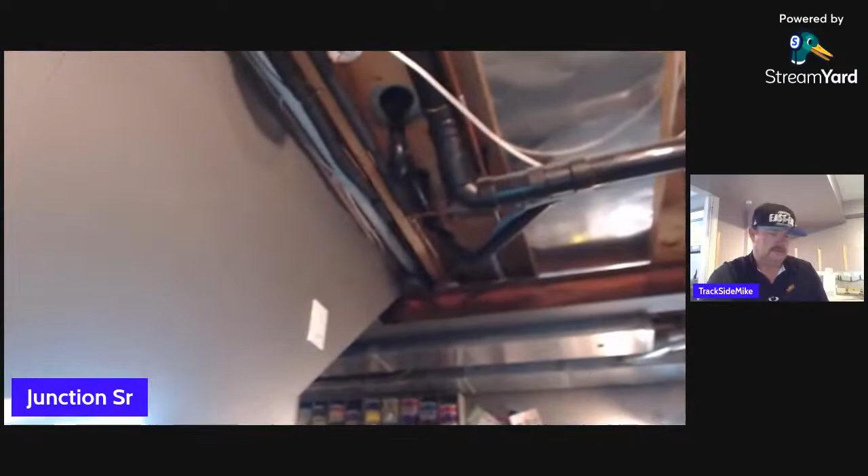This camera will pivot and I'll see which one gives me the best view. I'm gonna go through some things here, so I'll change this camera around a bit. All right, there you go, shows you the floor. Split Rock, how's it going? There's the ceiling, there's the bench, so you can see that pretty good here.

So I have on my desk here all kinds of wiring stuff. Can you see all this, Mikey? Yeah, we can see it.

Did you get that mat from M&M Rails? No, this came from OVR Trains. Okay, I just checked it, it's an XL mat. Nice.

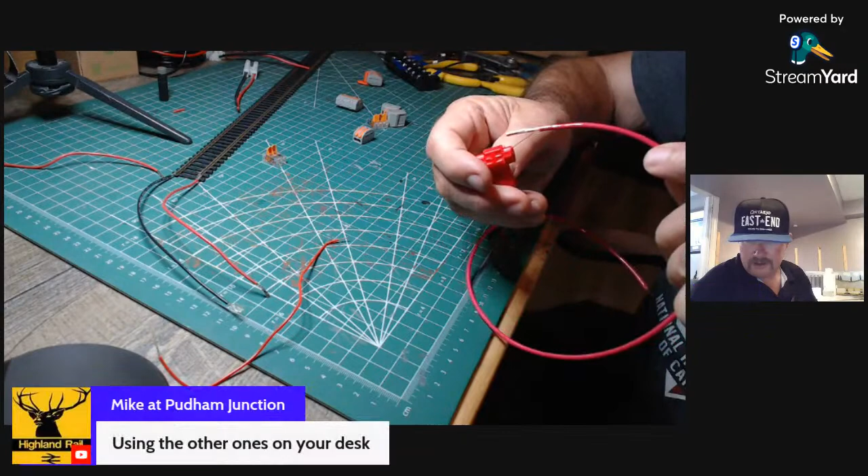One thing about suitcase connectors, you need the proper tool for crimping these things. It's called a pair of channel locks. I have the proper tool. What do you got? They're made by Klein, made for suitcase connectors. I just use channel locks.

Well, okay, you're not an electrical guy. I don't pretend to be a Sparky. That's what we call these, electricians. Well, I worked electrical all my life. So what I did in the other layout, I would take

Joe Raider, what's going on, Joe? So now we have our bus running around the layout, with a pigtail on it, not going to the track. So what he would do - this is my old test track, believe it or not. So what RC Grab Bag would do, he would take the feeder wire from his track. I'm only doing one wire.

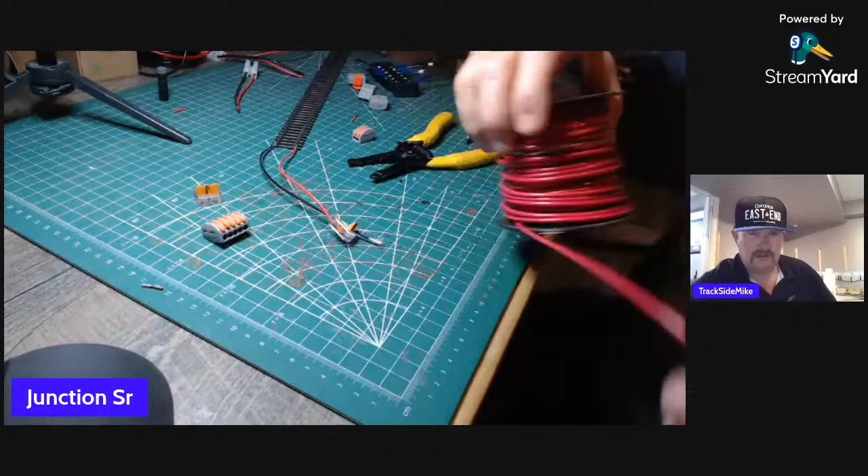What gauge are you using for your feeders? I'm using 14 for my bus, and 20 for my feeder. My bus is 14, but my feeders are 18. I prefer the solid wire, and I couldn't find 18 in solid as readily available, so I had to get mine off of Amazon for solid wire.

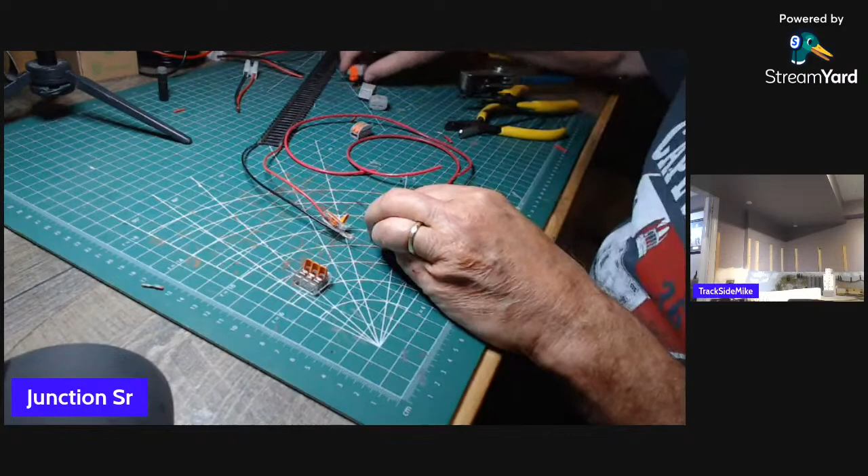I didn't copy it. You like that F word, eh? Free, when it comes to wire. Hang on a minute, I got the killer dog up there chewing on a pillow that I'm going to get in trouble for letting her chew. Don't blame me. You better not be chewing that - you'll be in trouble. Look at that, don't blame me. I don't have dogs. Doing one of them fancy pillows, you know.

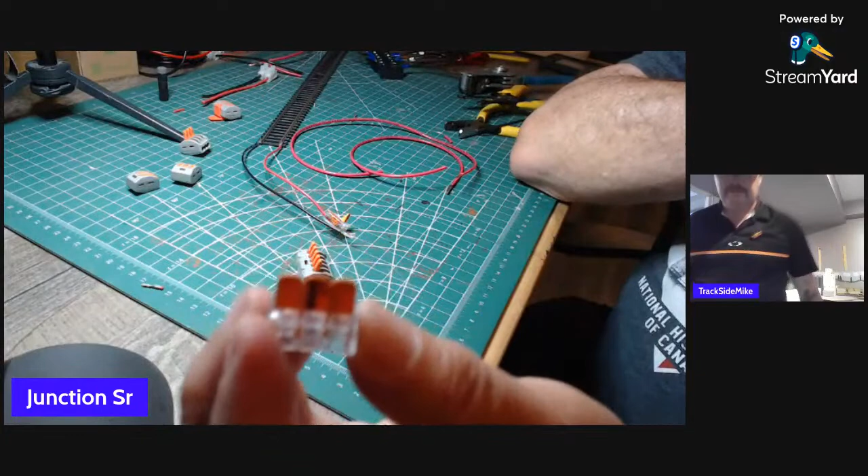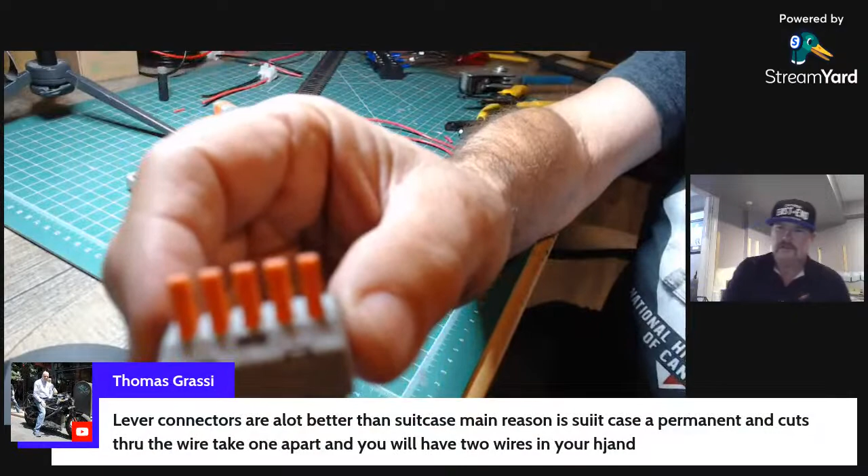So we have a couple of choices. This one here is the Wago connector - this is a second generation Wago, they improved on it. This guy here is a 5, it's not a Wago, but it's cloned after the first generation Wago. So it's got 5 connection points.

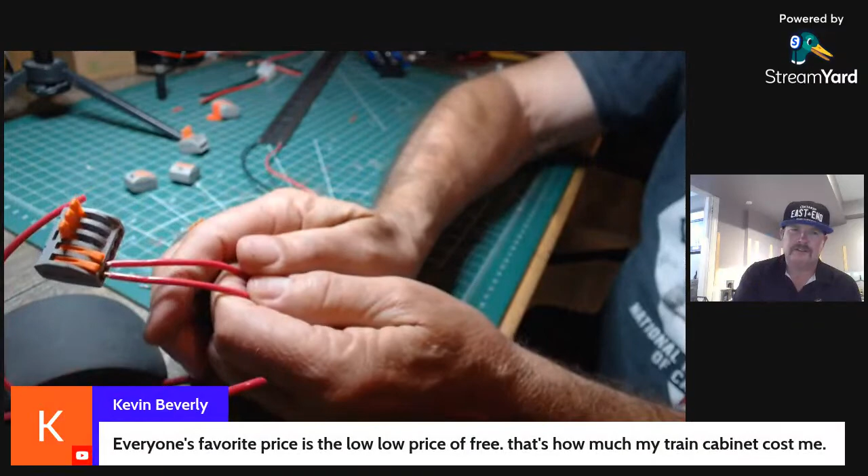So now I still got 3 points for 3 feeders to go in, and they're all connected to each other. Can you connect the wires on the other side of that? No, but they do make them to go the other way too. But I figured most areas you're hooking in between, you're running a bus wire around your layout - you go in and out and you have your feeders. When you're doing multiple districts, you're going to have lots of wiring.

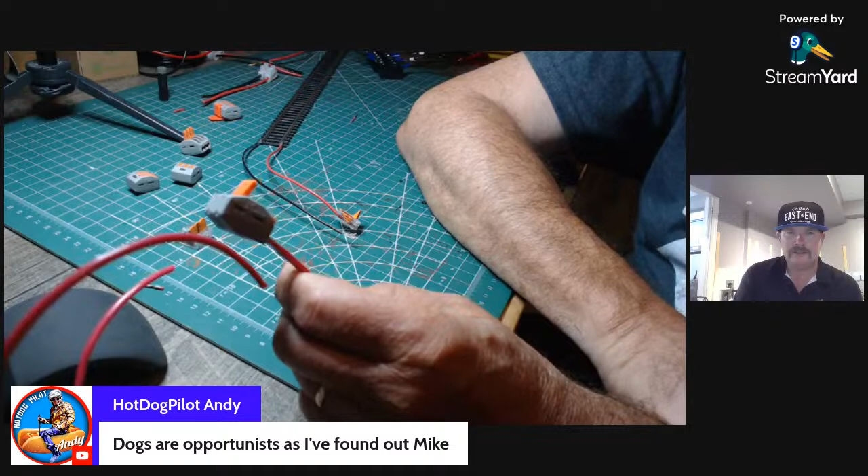We're planning a wiring schematic for my layout - there'd be 3 or 4 districts, so they're all different bus lines. Deep running railroad, Mike - lots of connections.

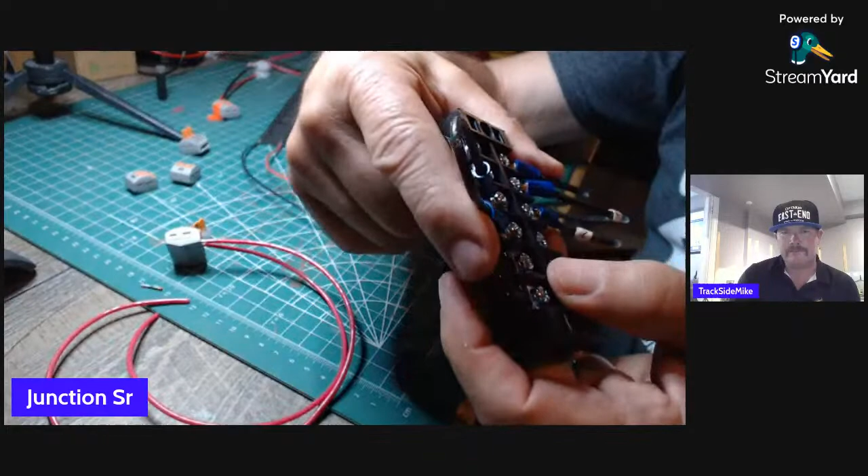I also got a few other examples of connecting, you're probably used to these. This is the old standby, you remember these? In and out, you cut a wire, you put in the middle. And you know these guys here - you can see, they come with jumpers in the back, can you see that? They're made by the people - these are Amazon, made in China. And there's another one, have you ever seen these?

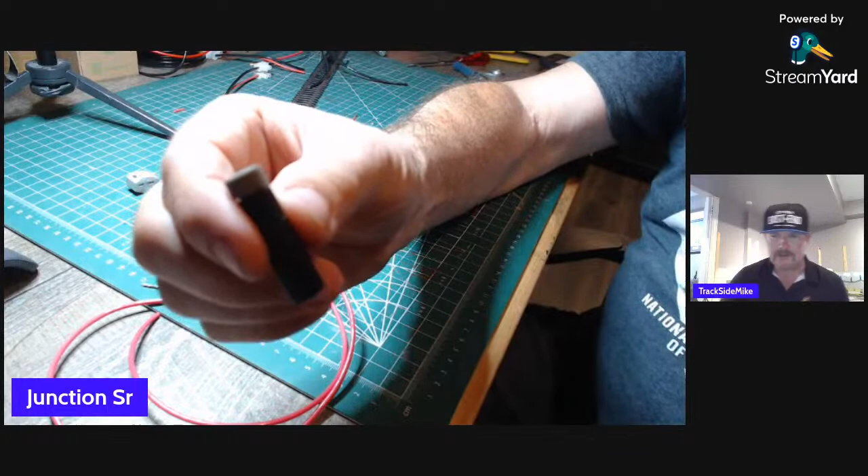I like the idea of these lever connectors, and also these levers here, they come with a little mount - you can actually mount these to your framework. Get a little hole there, and you can mount them up, and keep your wiring organized. Hey, Joe Rader, welcome. I use these blocks.

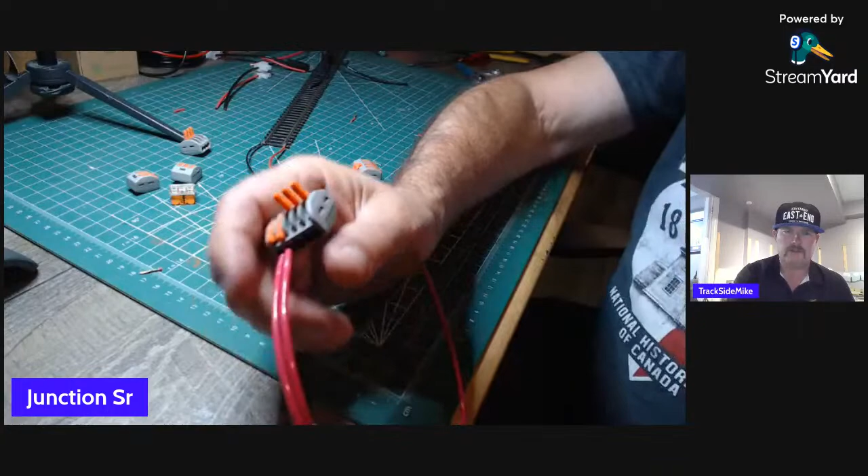Yeah, but this will be faster and easier to keep track of. So I'm going to be using these. I bought a bunch of the Wagos, just the 3s. You've got a bus wire going in, a bus wire coming out, and one feeder. But if you have multiple feeders in one area, you can do 3 at one point. Nice, so I think that's the way I'm going to go.

I also bought this last year. I don't know if I want to use it. This is Chinese wire, not made in North America whatsoever. But this stuff here is — this is number 20 NTE wire, made in the USA.

Yeah, it's the same stuff I got. So that's my feeder wire, NTE, black and red. I always use black and red because working in the electrical field with DC circuitry, you always use red and black, it's been a standard. And white if I'm doing lights, or brown if I'm doing a switch machine. I always do black for ground, but white if I'm doing lights.

But then T90 is your standard number 14. This is regular electrical wire, rated 600 volts.

I got CP368. How's it going, Timmy?

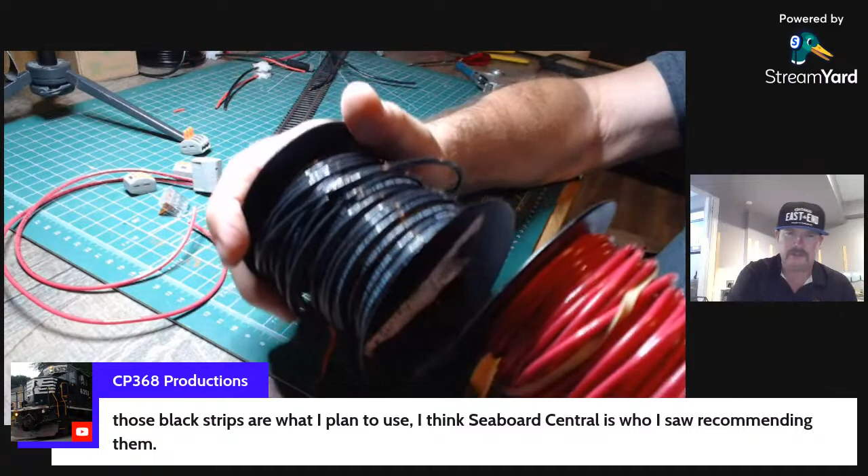So that's T90, which is number 14, rated 600 volts. We've got 12 volts, so we're doing good. But it's got a heavy coating on it, very rigid, got lots of memory in the wire.

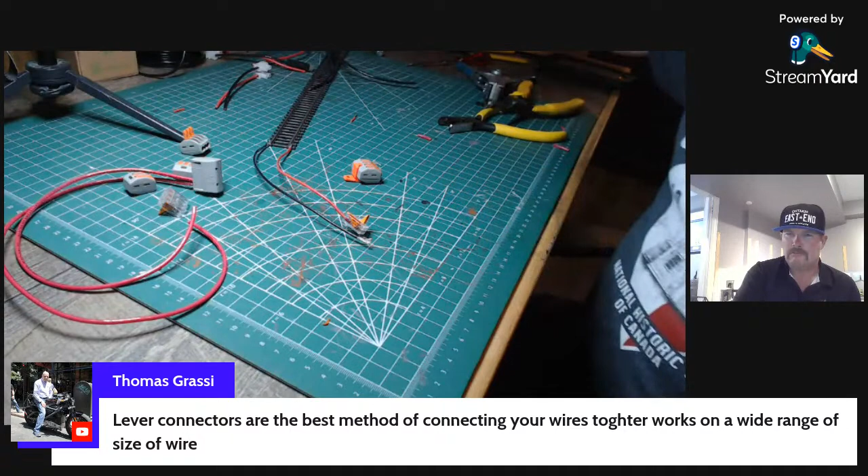But technically, in our DCC systems, we don't have a negative and a positive. We have — what's the right terminology for that? It's more of a phase than a positive and negative. Yeah, AC, isn't it? Figured as much. Whoa, it is AC. Yes, it actually is an AC circuit power.

Hey, Siri's talking to me. Who is? The phone. I don't know, it just came on all of a sudden.

So I plan to use the Wago connectors, either the Series 1 or Series 2, in my layout. I'll probably use one of these things at the point when all the wires come to one point to feed to my breakers. That's how I use the end, but that's the end only.

I also got a mail call here. This came from the UK, but I got it from a Canadian dealer. This is what I'm going to be using to power up my lift gate.

Is there two of those in there or just one? There's two sets. Okay, so I need one. Common denominator is two — you get two of everything. Just in case.

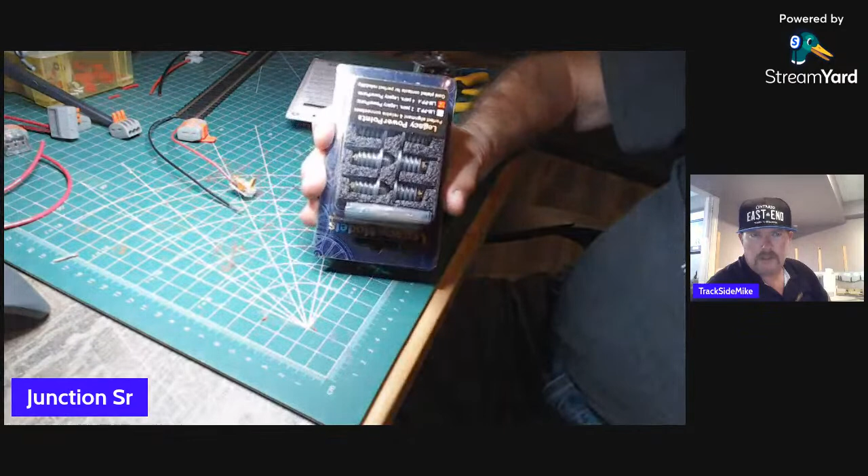I'm going to try and do a video on filming the construction of the lift gate using these connectors. They look neat, I'm going to try and engineer it to see what works best.

I learned from the last layout when you do a lift gate, you need to make sure your hinge is above track level. It has to be above the track line or it won't work. You got to go above track, there's no ifs, ands, or buts. It has to be, and I proved that point. So that's what I'll be doing for that.

Cool. So that is the wiring. Of course, showing the layout room too? You were talking earlier about showing off the layout room. Yes, I'm going to do that.

I'm going to pull this around. Bear with me because I got to move the stand. The cameras are attached to the stand, to the docking station. I found the bracket so it's more stable that way. So I'm gonna move my chair out of the way so I can wheel this high-class cart into the train room and not lose power. If I lose power, I lose cameras. And away we go.

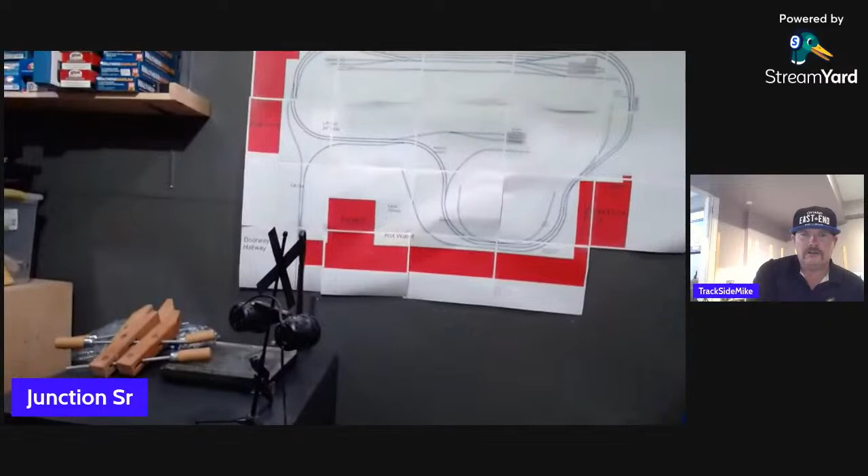So we're going to go over to the track plan, there's the track plan on the wall. Got your wooden clamps there. So that's the track plan there. So how big is the layout going to be? What's the size of the room?

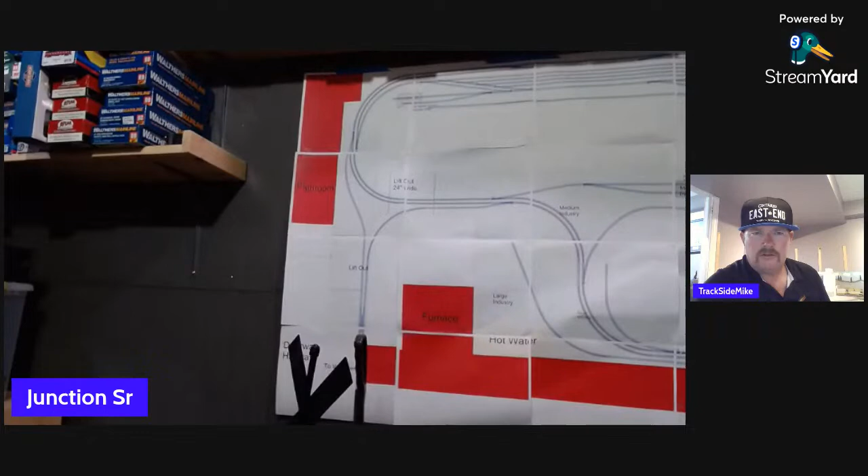15 by 20, the room. The long wall, from the track plan, is 21 feet. From this point here, the wall we're at, to here, is 21 feet. From this here to here, we're 13 feet.

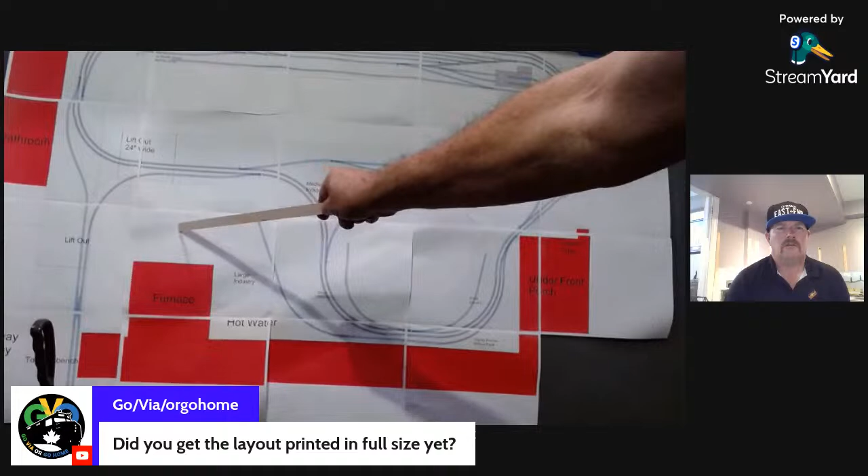Full size, huh? The only thing we had to deal with is under the front porch, and we had the furnace to deal with here, and we needed access space. So we did that.

Most of the curves are 32 and 30. Over here we have 30 and 32. Up in this corner here we're 30 and 28. Nothing less than 28-inch radius.

I made some changes to the plan since this was done. I've added another crossover here, and I actually put a track going across here. We're going to shrink this benchwork up because the track here is in midair - we're moving the benchwork over this way a bit because of the furnace, and that's where the tire plant's going to go. I added this extra track at the top just as a point to park locomotives on. That's the layout.

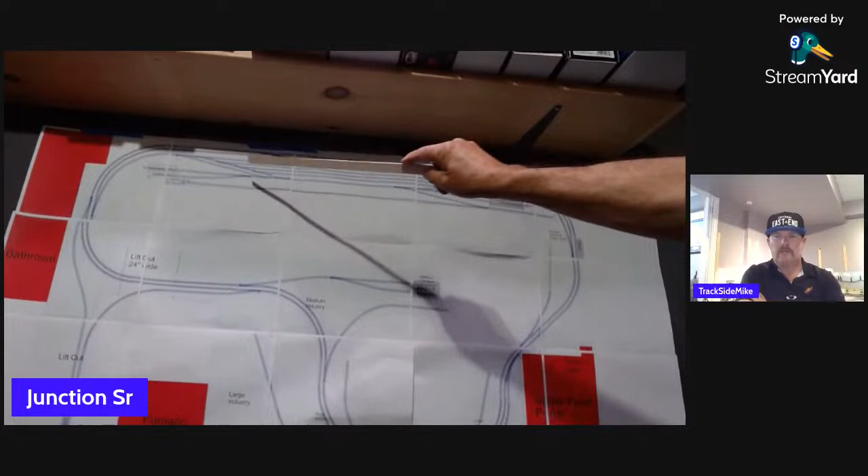Now, if you notice up on top, it's hard to see, but originally I had a double crossover over here. I took it out because I added the crossovers from Walthers up here - one there and one here. As Jason calls it, this track here is my caboose track. This is the lead into the yard here.

Hey, Randall and Derek, how are you? Chris had a question for you - have you got the print? Hey, Derek, welcome.

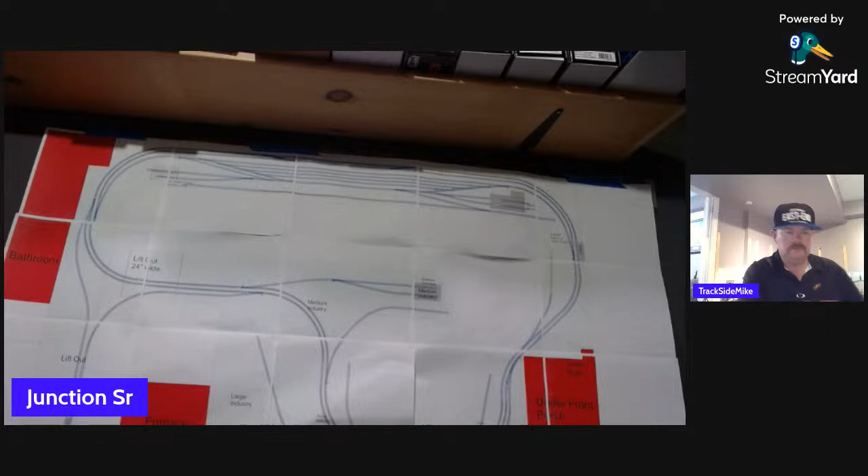Height-wise, I decided on 40 inches because of the room positioning. 40 inches, approximately right below that red line on my plan there on the wall. That red line is 40 inches.

How wide is each section? 2 feet. Well, this one here is 28 inches because down here in the floor, that box - that's my sump pump. It's there, I can't get rid of it.

So I did a 48-inch box on it, high. At 48 inches high and a little over 2 feet wide, are you gonna be able to reach the backside of it? I should be - well, I have no choice in the matter. The box is 28 inches, that's the width of the sump.

But that's the only wide point we're going to have. The back of the layout is going to be the main line, and I can control the crossover with turnouts, switch machines, so I won't have to do anything with that at all. So it won't be an issue.

I see Randall's in the chat somewhere. Hi, Randall. Yeah, Randall's popped in, and so did Derek Alexander.

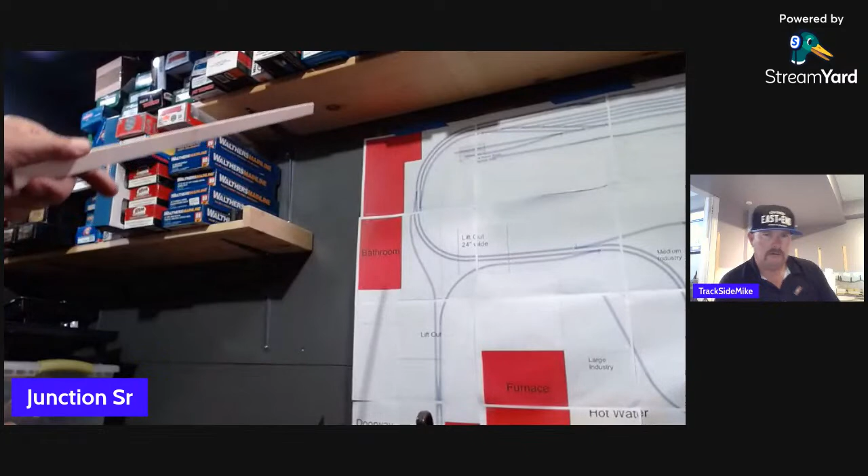So because we had to build a layout to suit the space - and this corner here, you see up in there, that red box in the corner - that's the plumbing stack in that corner. It is what it is. Live with it. But you can't cut through the plumbing.

But the section of track right here, this bench right here, we're all 24 inches. This benchwork over here in the corner, we're 24 inches. But up in this area here, which is blank space, that is the town scene - that's the alcove under the front porch.

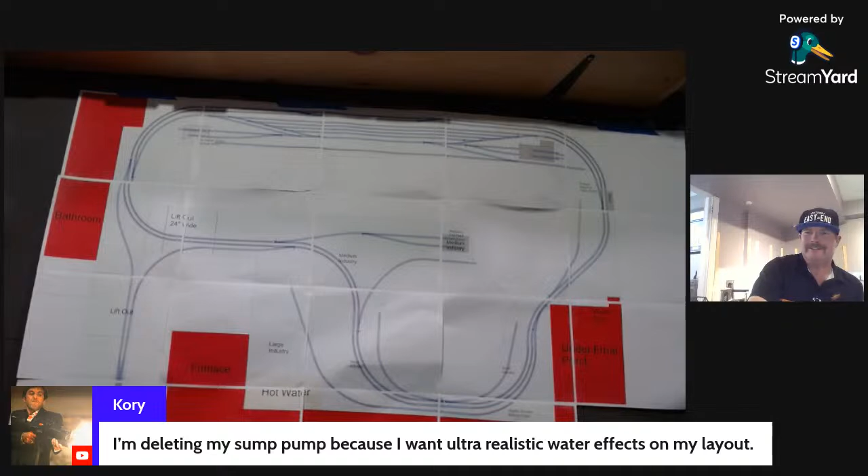Kory says he's deleting his sump pump because he wants a realistic water effect. Well, friends of ours from the community had their basement flooded. I don't wish that on anybody. Heck no, we don't need that.

But there's an alcove at the other end of the layout, Mike, where I'm going to put a town scene up in there, because once it's set up, there's no track technically in that area, just near the edge.

Now, have you left yourself room for expansion? There's no room to go, Mike. Just a thought - because you're going to go into that other room? No, well, the staging yard's going to the other room. You could add to the staging yard, the helix in the corner. No, there's going to be a workstation in there. The cabinet maker is installing it Thursday.

With a sink. He could have come back out of the staging on the second level. No. Just throwing it out there. I always leave room for expansion. Don't throw it out - it's gone. It threw it out and bounced off the wall.

It's hard to see here in the print, but the lift out is going to move down a bit further than what the picture shows.

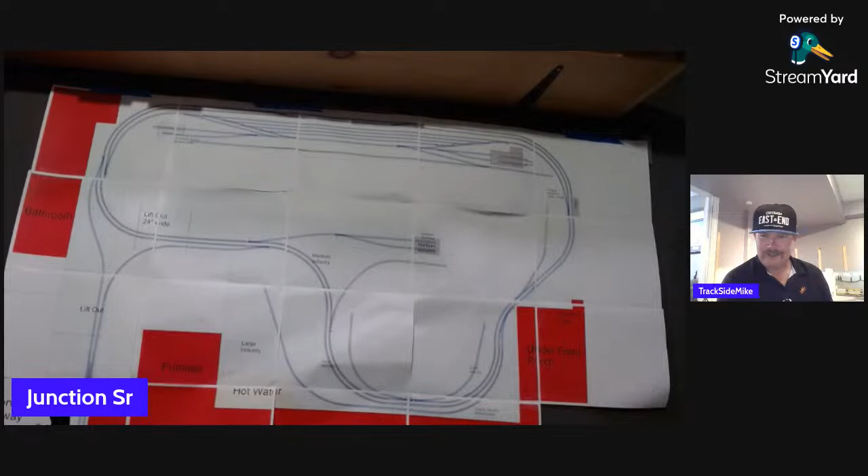Hey Bubs, how's it going? Hang on, let me pull this out of the way.

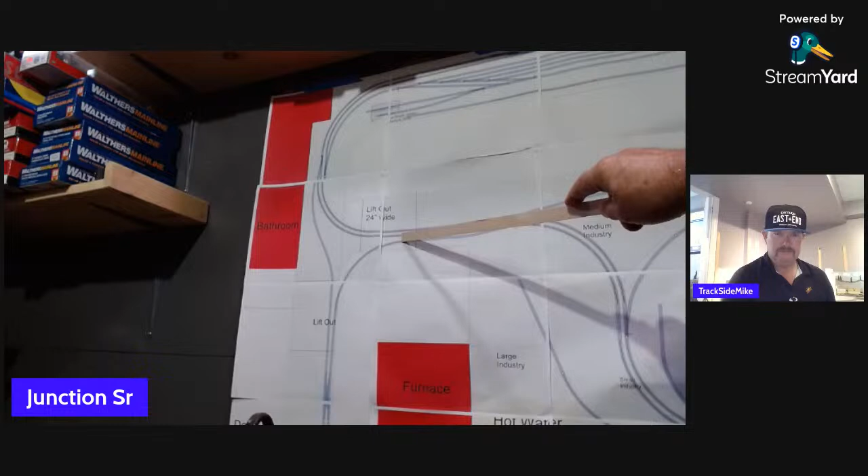Bubs in the chat. Right now, where my pointer is, that's the edge of the lift gate. The lift gate is going to move to here, this section right here. I didn't want too much of a curve on the lift gate, so I adjusted things to suit.

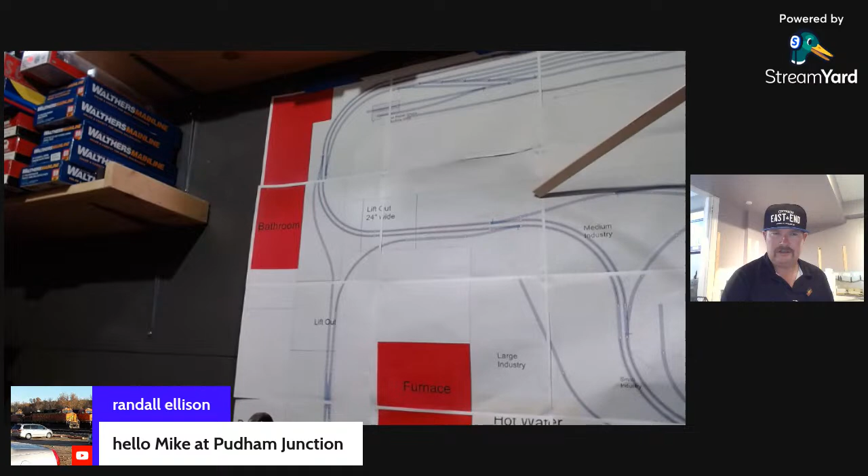It's going to go down right here, and the width of this lift gate is going to shrink. It's not going to be 24 inches, it's going to be the width of this, so I'm going to curve it into that. It'll be about 12 inches wide, and this is going to come out here. I might try to make this space a little bit bigger on the end here.

Just for detail, but no track, I don't think. The gap between here and here is 30 inches, and from here to here we're just over 30. I wished I had the room for a reversing wye up here.

But I don't know if it'll work, there's not a lot of space here. I would have to make a swing down. You want to be able to walk in between there, right? Yeah, that's the only thing.

So we live with what we have. We looked at some ideas with doing a turntable up in here, off this. I like that idea here, but I don't know if it'll work.

I don't have the room. It's not because it's too far away from the yard, just a lot of configurations that need to suit a need or a want.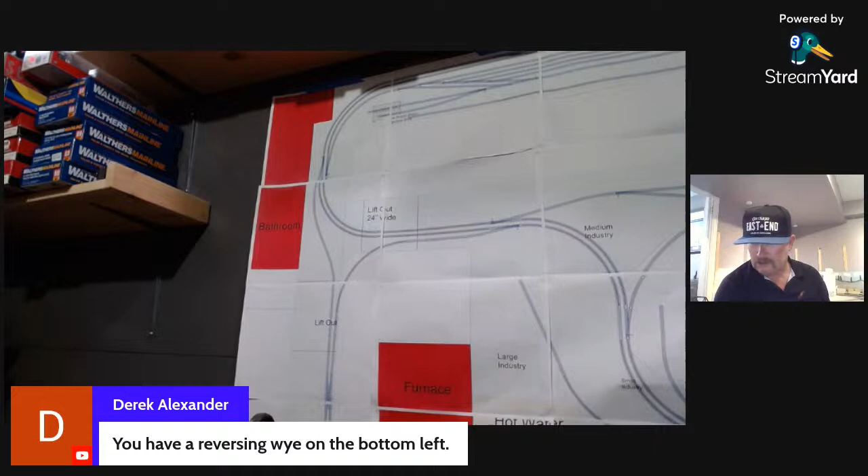Derek says you got a reversing wye at the bottom. I don't have a reverse Y, no, that's what I was saying. If I had one, it would go here. Oh yeah, but this going into staging, isn't that not a Y? There's no room on the other side, that's too far away again. The only way to do a reversing Y is somehow incorporate this track here and turn this into a Y, but then I lose the industry.

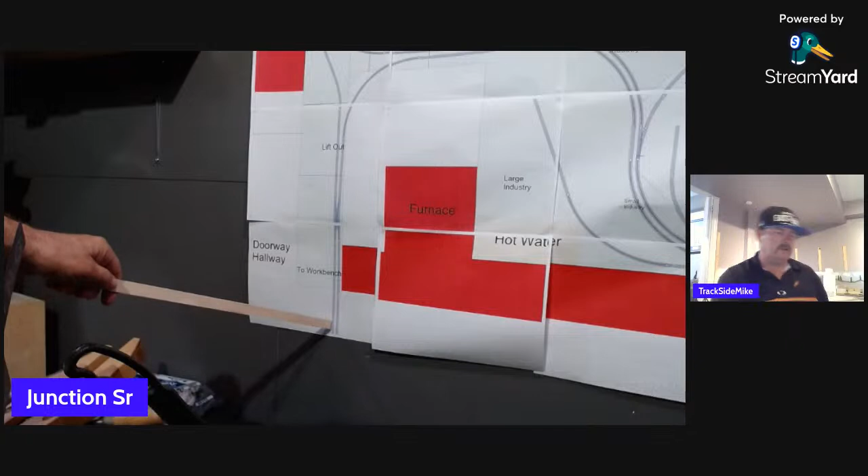I don't want a Y in there. No, but I thought that was a Y there. No, I took it out. The idea is this track here, I could take a train and cross over, go this way, or I can come up or straight in this way. Or I can take a train from here, cross over, go this way, or go that way. Still haven't got it.

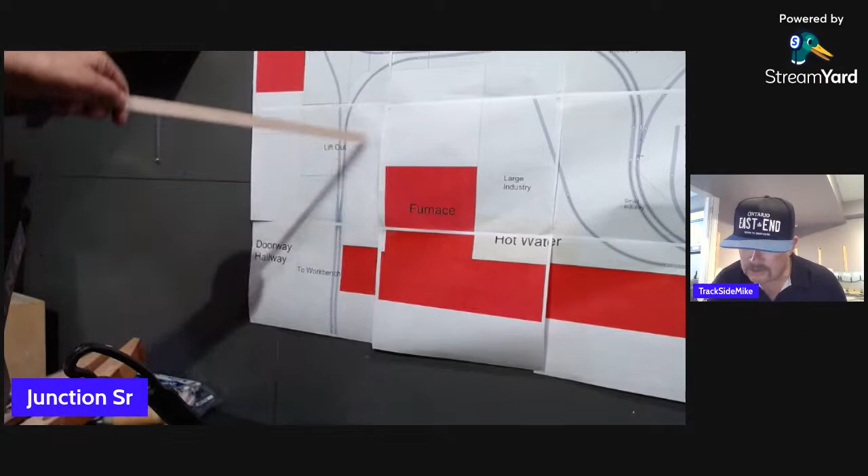And from here to the wall is 10 feet of space. Oh nice, so that'll hold a decent long train. Yeah, build yourself a good train there. So 2 trains held here, and you're gonna have a locomotive in here.

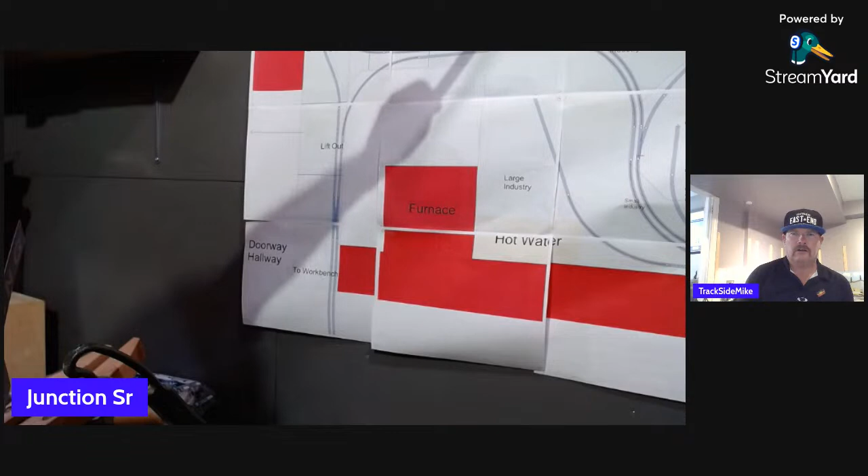The only way for a reversing Y is somewhere in this area here, but I don't know if it'll work. I know I do not have the room for a turntable here. Just don't have it. You'd have to make this bench almost that wide to do it. Not sure, and don't forget too, the curve.

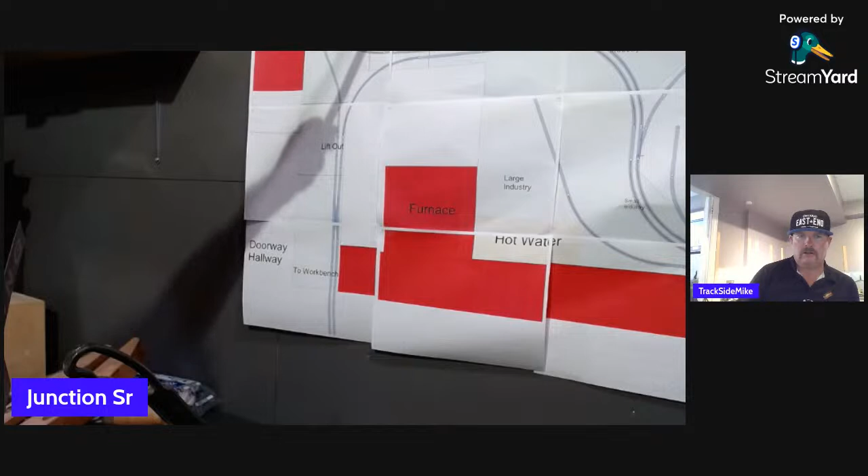We have 30 and 32 inch radius up here. This is 30 and 28, we're a bit wider here. So that means this curve here is going to be 24 inches, coming out here. So the turntable's got to be in this area here. This is not going to work, it's going to interfere with everything else. Just don't have the physical space.

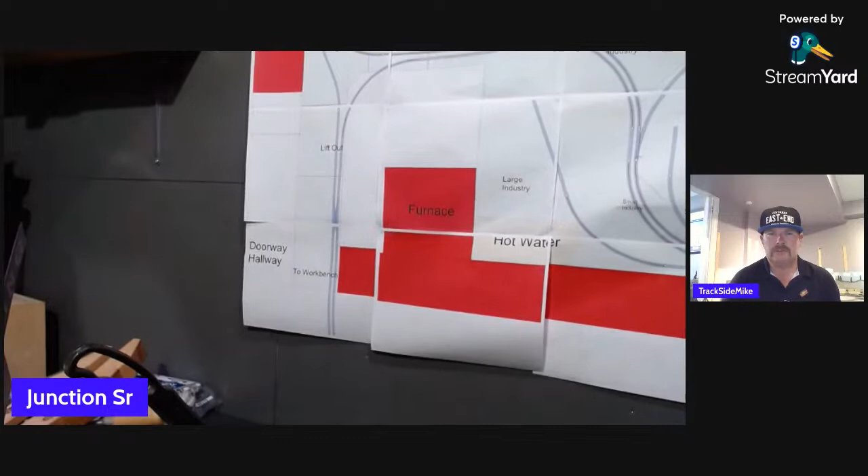We're still looking at the bottom too, by the way. Well okay, let me turn it up there. There we go, you see that?

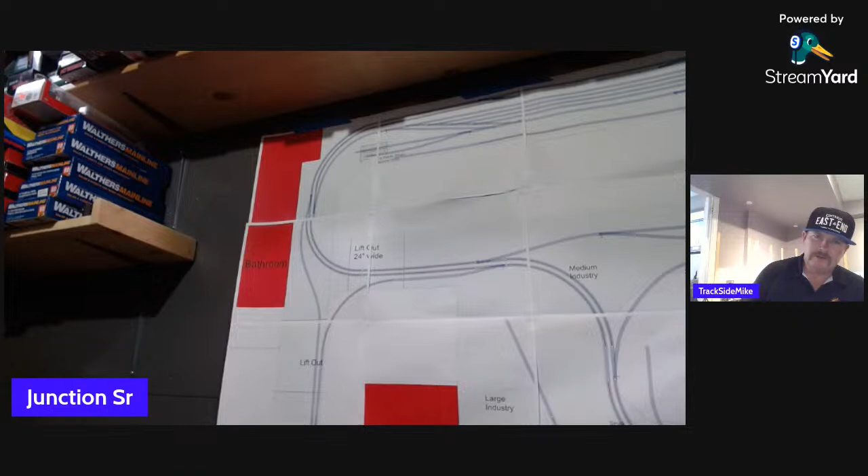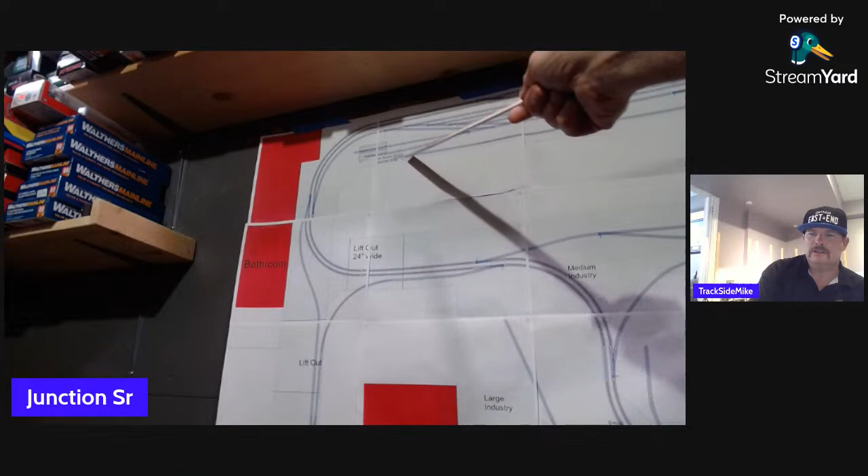What about you put it up here? Or over here, I guess, like where your caboose track is? Yes, and just have one feeding into the turntable and then your turntable. Well, that's the track I was going to use here. But this one here, it's still a 24-inch radius, that's 24 inches to the curve.

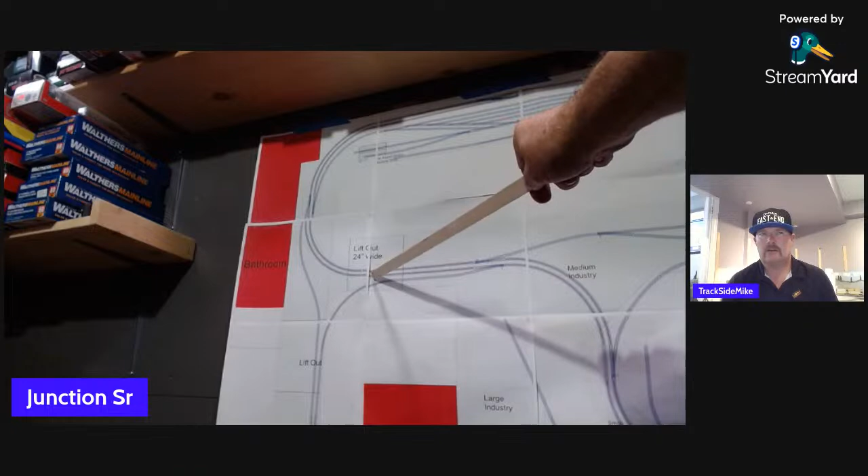Don't forget, we're only talking this space from here to here, it's only about 6.5 feet. Don't forget that, it's not very wide because I had to eliminate stuff because of the furnace. We need access to service the furnace. And to get the curves up here, I need a distance for that too. Right, it's just not there.

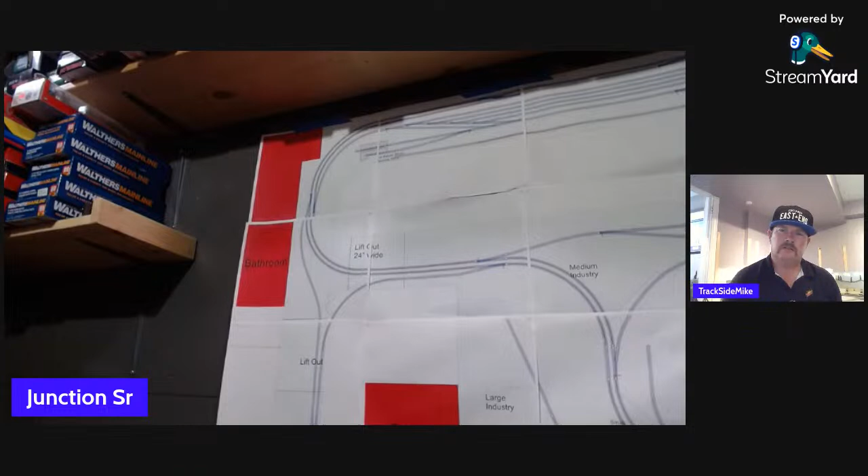You can hear me okay because I got the mic turned around. Yeah, we can hear you, son. That's the better mic we found out too. Oh nice. Yeah, and another mic. I haven't found it though.

This is what we're gonna build. I've added a track over in this corner here, you can't see it there. I added a switch to here, and I put a track on the other side of the station, which brings up to here for the station itself.

I'm waiting for the material. Yeah, adding on the material. How about where it says Medium Industry, just to the right? That is my tire plant that I'm putting in there.

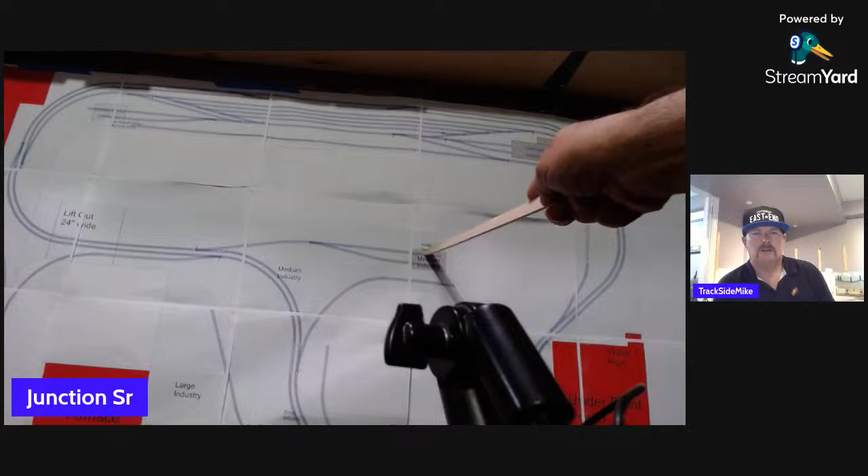Sure, technically you could put a Y in here, but then I would lose the... Now that's a possibility, if when I get bench work built, when we look at it and redesign this area here, yes, potentially a Y could go there.

But it's still a long ways from your staging, your track, your yard. It's the opposite side of the layout, so I don't know if that's possible, but there's nothing against it, that's for sure.

We can expand this space here. So this track here and this track could be married together. But I still need a spot — that's a pretty big building.

That's a big kit, Mike, I got you. Thanks, Mike. That's a big building, yeah.

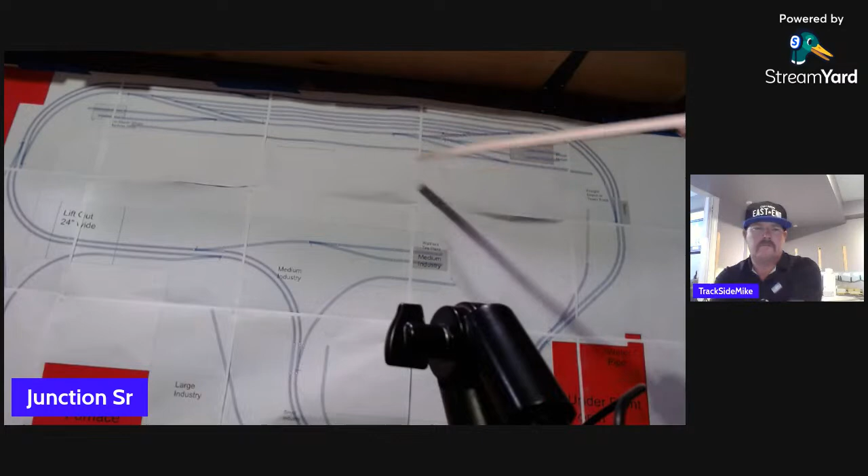Big kit — this is the diesel house kit that you guys built on the brunch build. Remember that kit, Mikey? Yeah, it's right over here. So that's going there. This is the machine shop over here, and the rest of it, the town scene's going over here in the alcove. You mean that kit? Yes, that kit, that's right. Yes, sir, that kit, and the town.

Then the rest of the kits will spread around the layout as we need. We've got lots of space in here for buildings and along here.

We moved the main line at the back here so we can put — let me raise the camera a bit more so you can see it — backdrop buildings along the back main line. Now, mainline, I'm going to raise this track about an inch or so higher.

I'm going to use Woodland Scenics incline kits, but I'm going to stagger the incline. So this track here is going to start off here, and I'll try to start this one at a different point so they won't be starting at the same spot. And here that may come down the same, but I figure about an inch or so, just to get it higher than the yard, not too much.

Hey, Thomas Grassi. Now Thomas Grassi is helping me with some sort of wiring plan so we can isolate all the turnouts with isolators. We can plan for the future in districts, because I have the EB1 circuit breakers I'm going to add to the system.